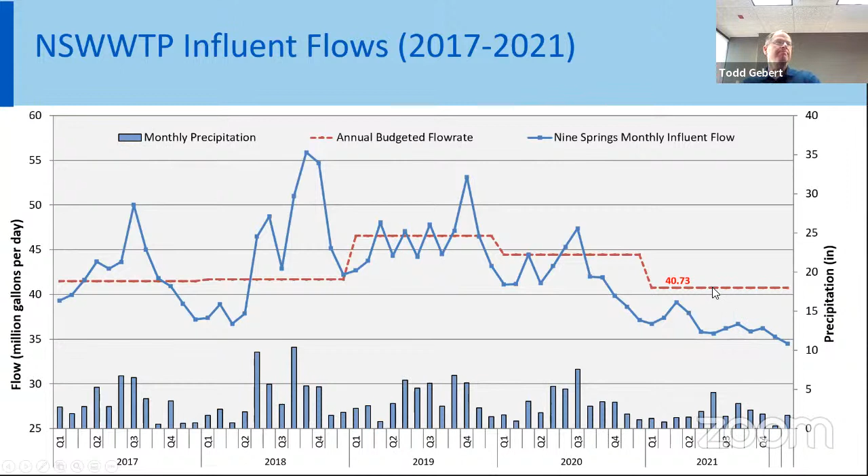They go in lockstep. So for 2021, we had about 22 inches of rain, about 12 inches below our average amount. You have to go back to 2012 for a very similar year, and you see about the same effect. Flows were in that 36 MGD range.

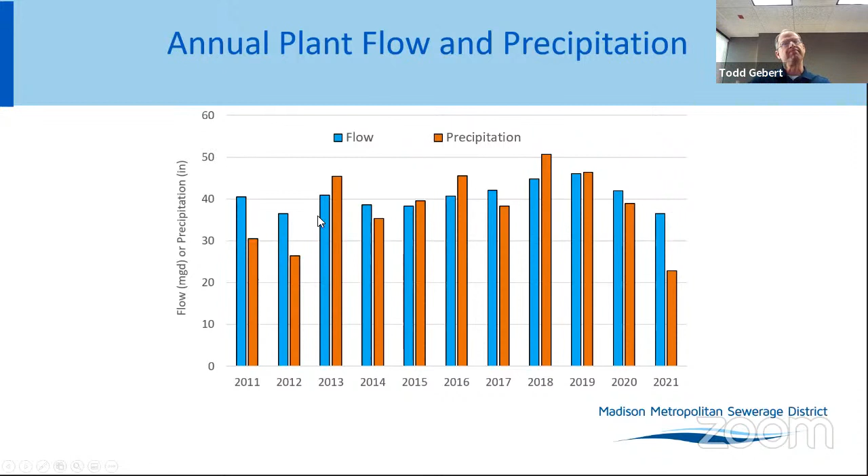That's not unique. What is unique, though, is the magnitude of these dips. In December, late December, during the Christmas holiday, we actually got below 29 MGD to the plant, and you have to go back pretty much to 2012 to see a flow that low to the plant.

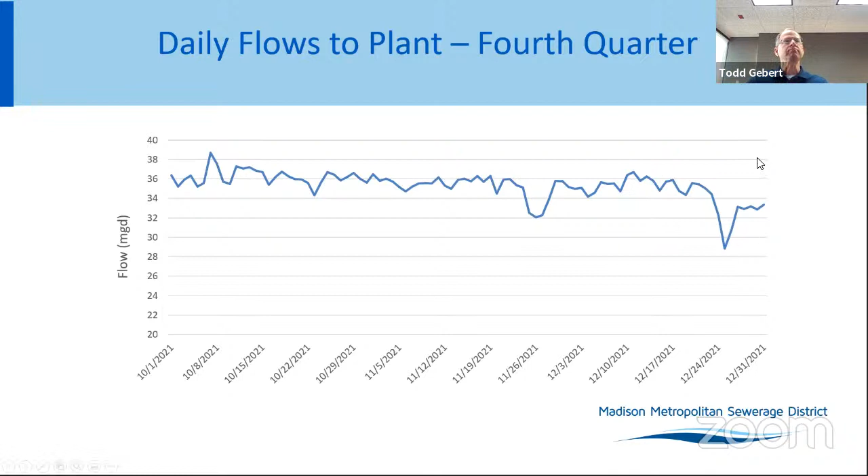Just a reminder here about why we saw such large surpluses. You go back to 2020 and the pandemic, you see how the loadings dropped throughout 2020. So when we did rate setting for 2021 in the fall of 2020, we assumed that loads would stay at their pandemic levels. Instead, shortly after that, they increased markedly and have kind of plateaued throughout 2021.

That represents this large surplus that you're seeing here in 2021. But the loads are really not that much larger than what we saw in 2019, just before the pandemic.

If you look back at the last 10 years, there's some ups and downs, but on average actual revenues have been only 1% above what we budgeted. So we're doing fairly well over the long term.

So the requested action today, staff is asking the commission to approve sewer service charges for the fourth quarter of 2021 through approval of resolution R7. And with that, I will take any questions that the commission may have.

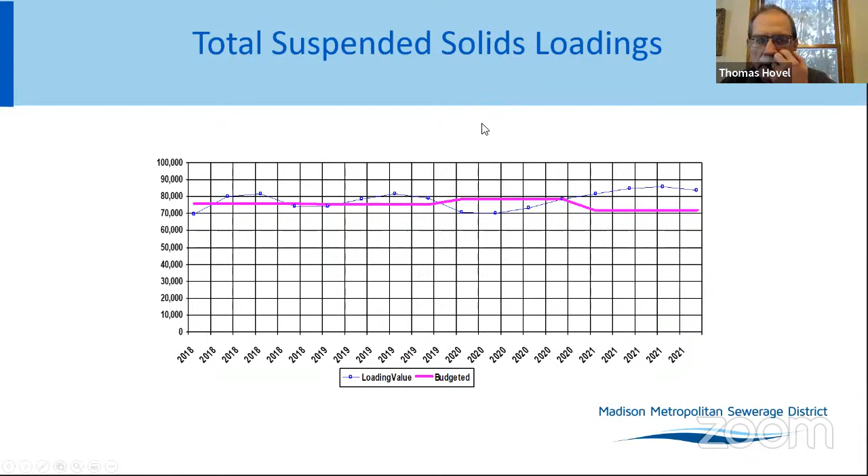Okay, thanks, Greg, for your question, and Todd. And if you have any other thoughts, Todd, you can get in touch with Greg. Sure. Okay, so any other questions? I didn't see other hands pop up.

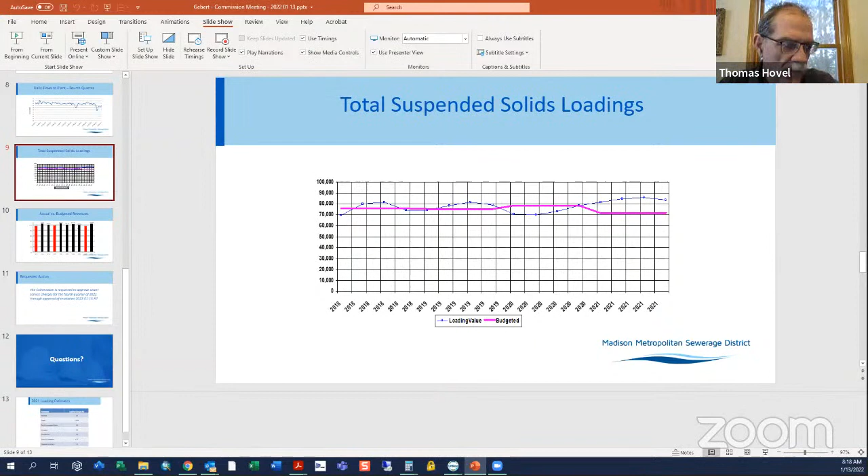So do we have a motion to approve the fourth quarter 2021 sewer service charges?

Wilson, I'm happy to make that motion to approve the service charges as indicated by the resolution presented. Okay, we have a motion by Commissioner Wilson, second by... I'll second. Okay, second by Commissioner Meyer. So motion by Commissioner Wilson, second by Commissioner Meyer to approve the fourth quarter 2021 sewer service charges.

Any discussion or additional comments? Seeing none. President Hovel, just a reminder to the commission, we have on the commission agenda coming up in a few weeks, with this increased revenue amount, how to direct those funds. Our budget manager will be returning to the commission with some specific action on that.

Okay, thank you, Michael. So we have the motion by Commissioner Wilson, second by Commissioner Meyer to approve the fourth quarter sewer service charges. All those in favor say aye. Aye. Aye. Do we have any opposed?

Okay, none, motion carries. That will take us to the acceptance of work for the Nine Springs Liquid Processing Improvements, Phase 1.

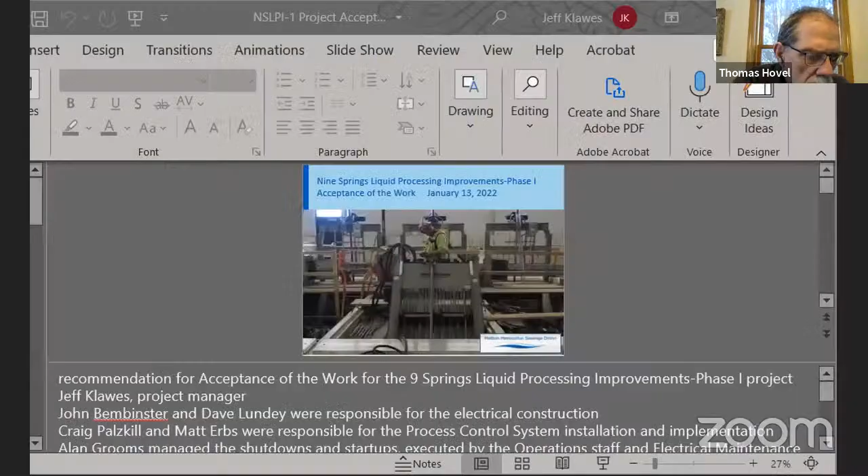Okay, am I able to share my screen now? Yeah, you can share your screen now, Jeff. Oh, sorry. Sorry, I've not done this before, so it's a little tricky.

Good morning. I'm Jeff Klawes, a project engineer here at the district. I was the project manager for the work. The presentation is a recommendation for acceptance of the work of the Nine Springs Liquid Processing Improvements Phase 1.

As I said, I was project manager for this work. Other district staff involved: John Bembinster and Dave Lundey, responsible for the electrical construction; Craig Palzkill and Matt Erbs, responsible for the process control system installation and implementation; Alan Grooms managed the shutdowns and startups, which were executed by operations staff as well as electrical maintenance staff. The consulting engineer for the project was Strand Associates. The general contractor is C.D. Smith Construction.

The photo here is of our new installation of our new ultraviolet light system. The liquid processing improvements enable us to effectively manage future peak flows, specifically preventing in-plant overflows, improving peak flow treatment, and minimizing process disruption during peak flow events. We also improve liquid processing reliability by replacing or rehabilitating critical infrastructure.

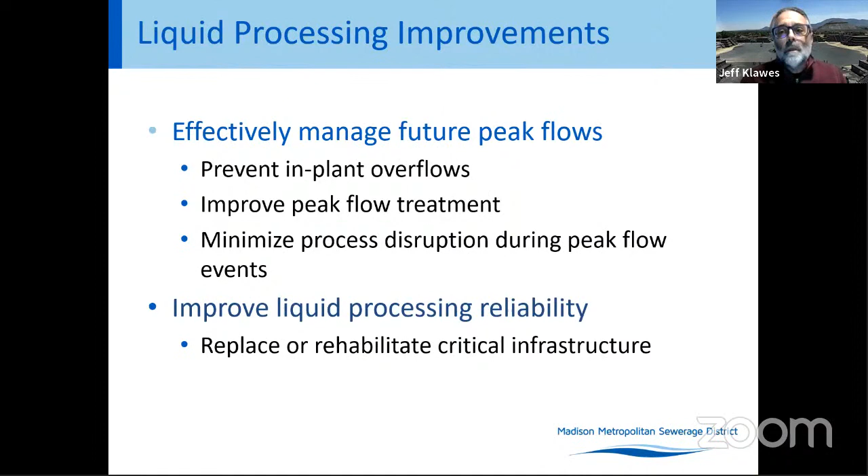The construction work took 18 months. Substantial completion ran about 4 weeks beyond our original scheduled date. The ready-for-final-payment date was extended further, mostly to accommodate the delayed delivery of some minor equipment for the project. The UV disinfection system was ready for service for the 2021 season. The work of removing the old system and replacing it took place in the October 2020 to April 2021 timeframe.

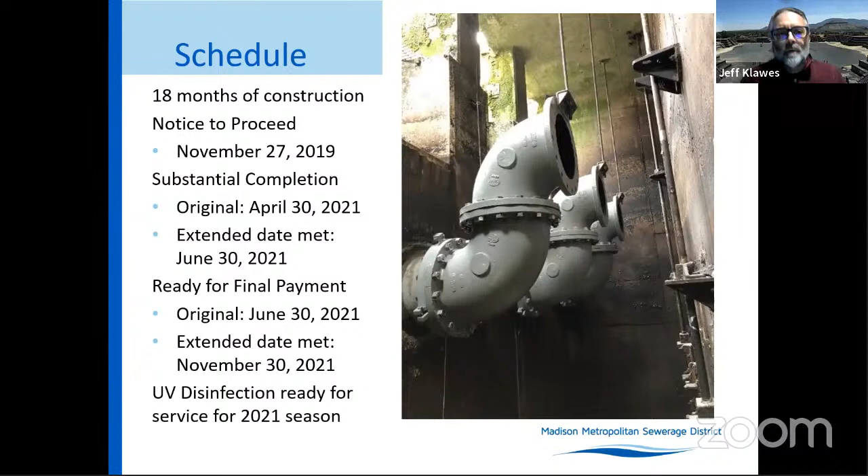The total project was completed within budget. For the construction contract, there were 65 change orders amounting to about a 3% increase.

There were no significant changes to scope. Mostly the change orders were detailed change orders, making pieces and parts fit, replacing what was needed to move the project forward, and repairs and replacements that were best done within the context of the project. The photo to the right is actually a change order.

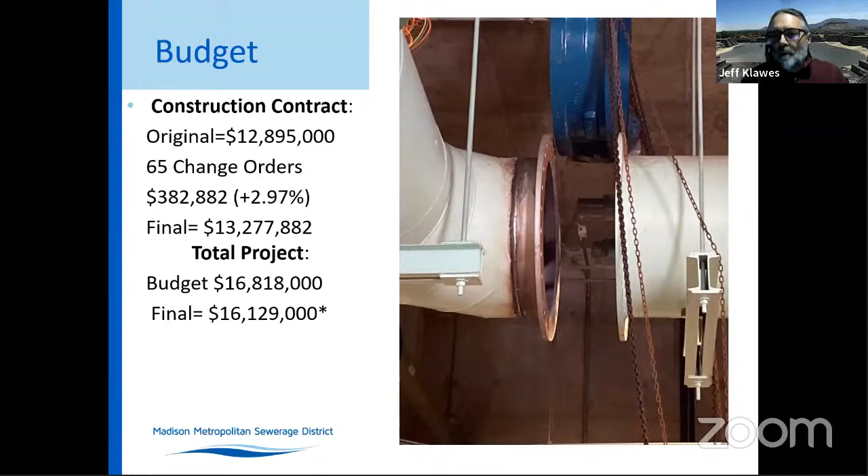The new blue valve, you can see my arrow there, was part of the contract work. The intention was to reuse the existing pipe. The pipe to the right was fine, in good condition. To the left, the existing flange was corroded to the point where we couldn't reuse it. The contractor fabricated new pipe, cut off the old pipe, and welded this in place. For perspective, this is a 30-inch diameter steel pipe, and all of the work was done about 18 feet off the floor.

We're now able to better utilize final clarifier capacity, mostly the west final clarifiers, and the improvements also allow a more equal split of peak flows between the east and west plants. The improvements to the existing plant to better utilize capacity and peak flow performance are listed here.

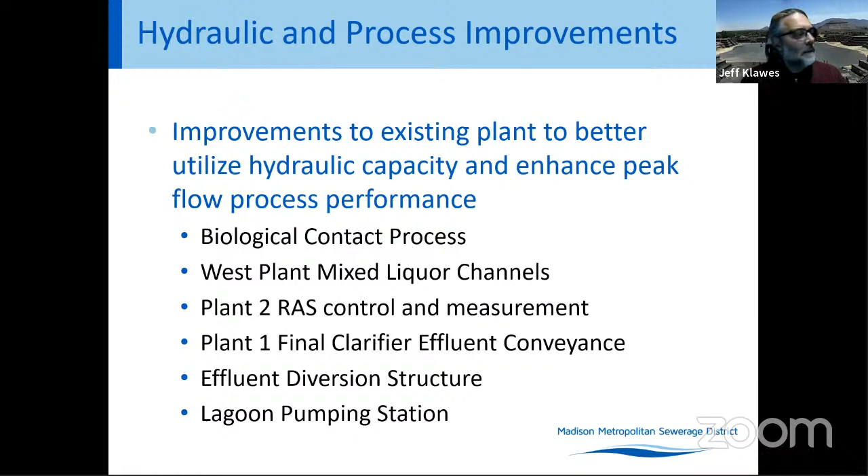The implemented biological contact process, work for the west plant mixed liquor channels, the plant 2 RAS control and measurement, plant 1 final clarifier effluent conveyance, effluent diversion structure, and the lagoon pumping station. The locations of these project elements are shown here.

The biological contact process implementation, which revises the flow pattern through the aeration tanks, was completed in both the east and west aeration tanks. The west mixed liquor channel takes flow from the aeration tanks to the final clarifiers. We increased the size of the final clarifier effluent for plant 1 here. The plant 2 RAS control and measurement improvements were done in the aeration control building 3.

As explanation, mixed liquor flows from the aeration tanks to the final clarifiers, where activated sludge settles out. Some of the sludge that settles out is pumped to the digesters as waste activated sludge. The remainder of the activated sludge is pumped back to the aeration tanks, returned as return activated sludge, or RAS.

The old valves that were in place in the aeration control building were very difficult to operate, particularly at peak flow events. The open channel measurement that was in place would flood out and become inaccurate. So we replaced the valves with new control valves and electric mag meters for flow measurement.

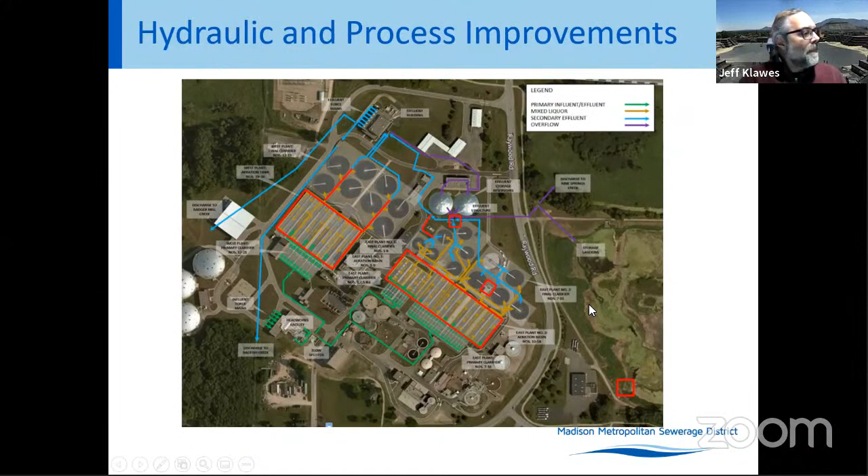For the biological contact process, the implementation was in the aeration basins. What we're looking at here is the west plant, which actually has 2 plants within it: plant 3 and plant 4.

Once the meters and valves were installed in the gallery below this channel, and once all the plates were in, we put plant 4 back into service, and work was done in plant 3. Valves and meters were installed in the gallery below this. Once those meters and valves were in service, plant 4 was taken out of service and plant 3 was put back into service.

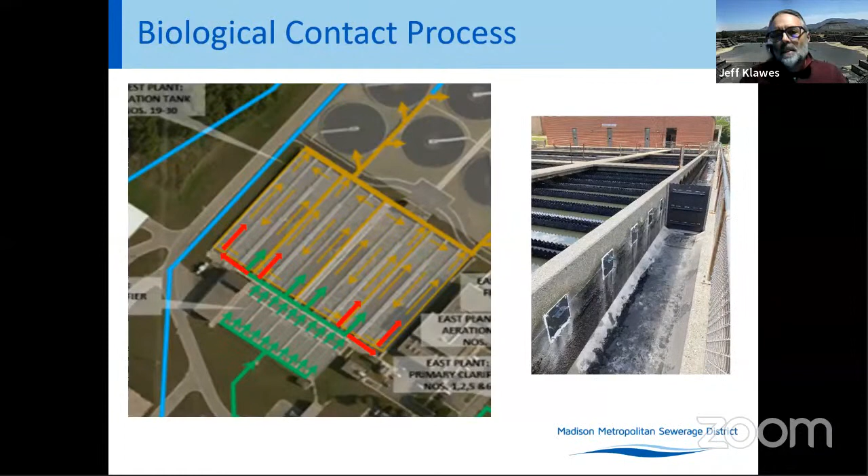I just want to comment that the complexity of these shutdowns, startups, and transfers is not just draining and filling the tanks, but also maintaining the efficacy of the biological process throughout those changes and afterwards.

For the west plant mixed liquor channels, we needed to increase the capacity of the channels to convey, so that we were able to convey 90 MGD through the west plant. We increased the height of the walls to be able to convey more flow. We also worked on replacing the aerators in these channels.

You can see that the old pipes were really badly corroded, with only about half a pipe section remaining. The new aerators and pipes were put in place. Here you see the completed channel where the walls are raised, the aerators are in place, and the channel is ready to be placed back in service.

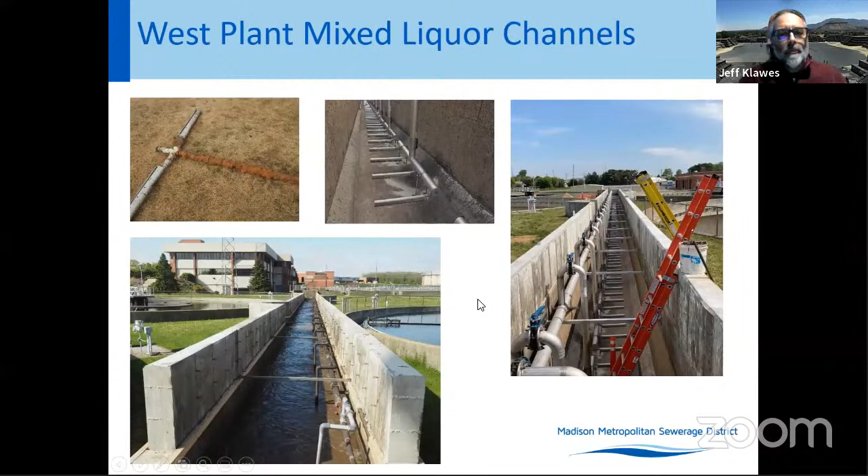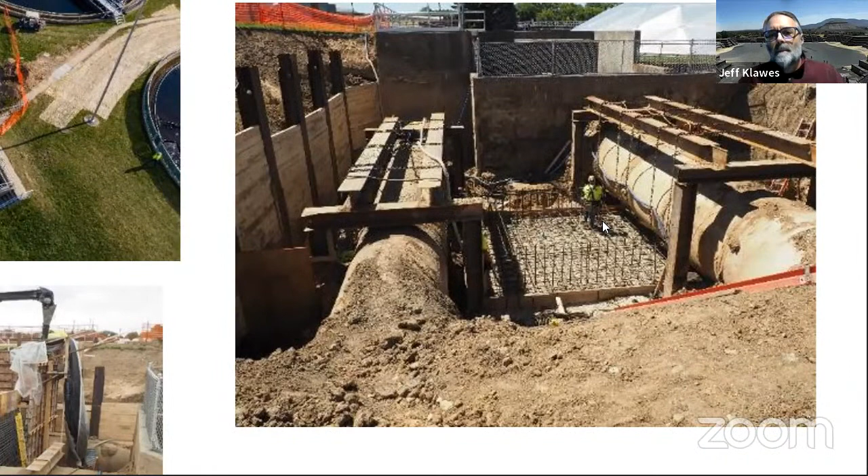So the structure that we built in between allows us to take flow directly from this east plant effluent pipe, put it directly into the overflow, and send it to the lagoon without having to go through the effluent building first. The picture to the left just gives you an idea of the scale of the structure.

At the lagoon pumping station, this returns that stored overflow so that the pumping station allows us to send it back to the plant. Most of the work was construction of a screening facility.

To do that, the contractor had to both isolate the construction site from the lagoon. They did it with this dam here. And then for the excavation, they had to hold back the soils as well as be able to dewater the site.

The completed intake structure is here, where you can see the screen and the isolation gate in place. So the structure allows us to both isolate it from the lagoon and prevent debris from getting into the pumps. We added a redundant pump, new controls, and also metering of the flow. Both the isolation gate and the stairs to the screening structure provide a safer work environment for our staff.

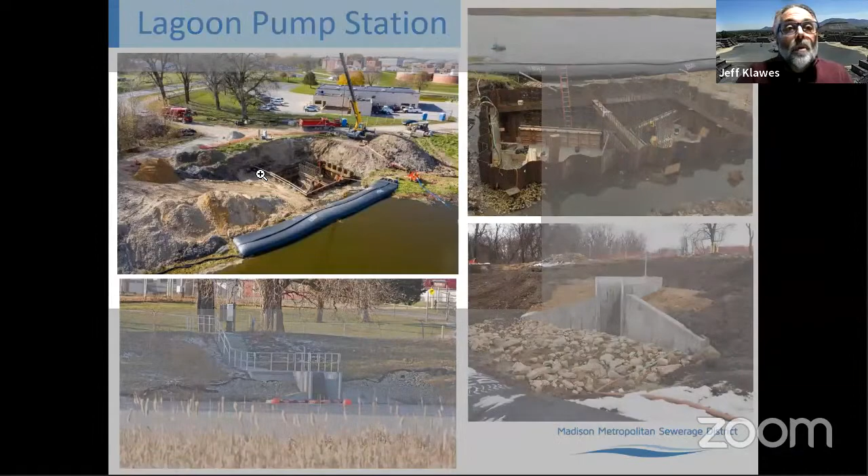Just as with the actual pump station itself, the screening structure is here. The pump station is underground in here. So the screening intake is here, connects to the pump station, and then sends back to the plant. And also this is where the controls, we provided new controls there.

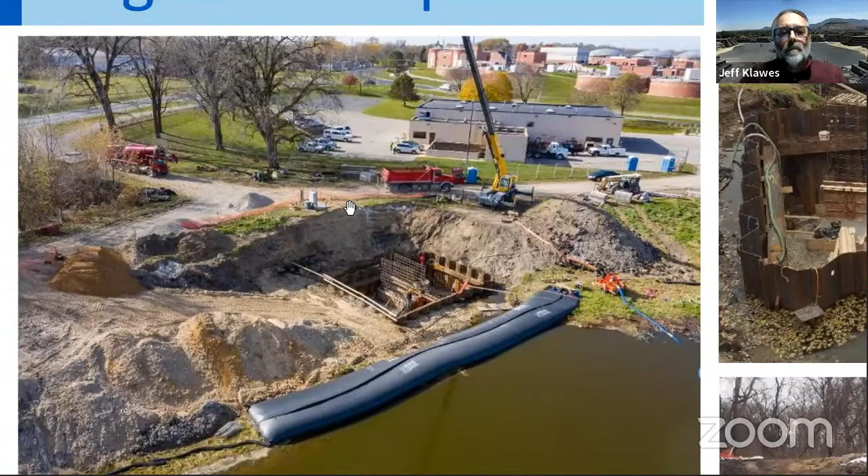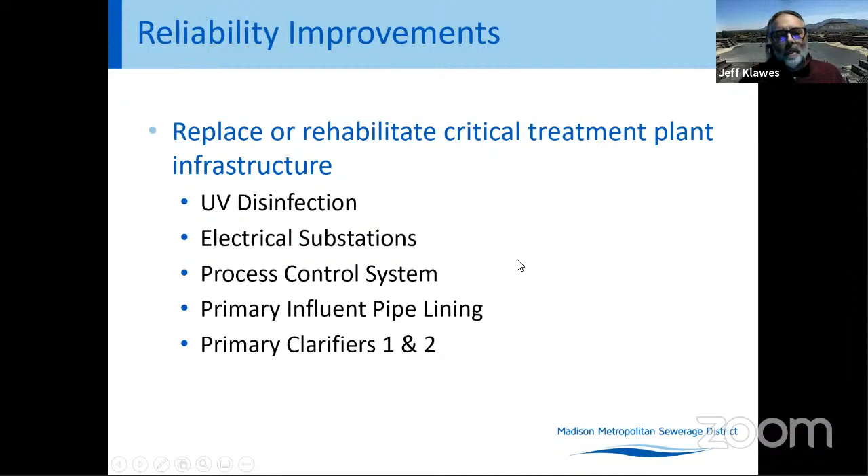For reliability improvements to the infrastructure within the plant, those items were the UV disinfection, electrical substations, process control system work, primary influent pipe lining, and also work on primary clarifiers 1 and 2. Those items are located here.

The ultraviolet light system was installed in the effluent building. We provided a new electrical substation which replaced 3 substations. U6 now provides the service that stations 11, 12, and 13 once did.

The process control system upgrades replaced digital control units related to the liquid processing system. They're located in the west blower building, aeration control buildings 4, 1, 2, and 3, and also in the east blower building.

The primary influent pipe lining is this red line here, where we went from the east junction structure, took a bend, and then went into the east primary influent channel. And finally, for the rehab projects, we replaced concrete at the primary tanks 1 and 2.

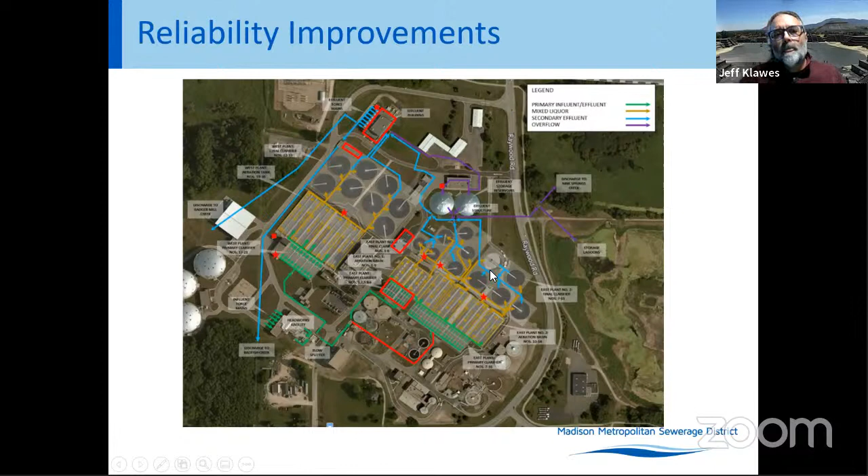For the UV disinfection replacement, the old system was obsolete. It was no longer supported by the manufacturer and required labor-intensive maintenance. The new system is energy efficient, self-cleaning, and more maintenance-friendly for our staff.

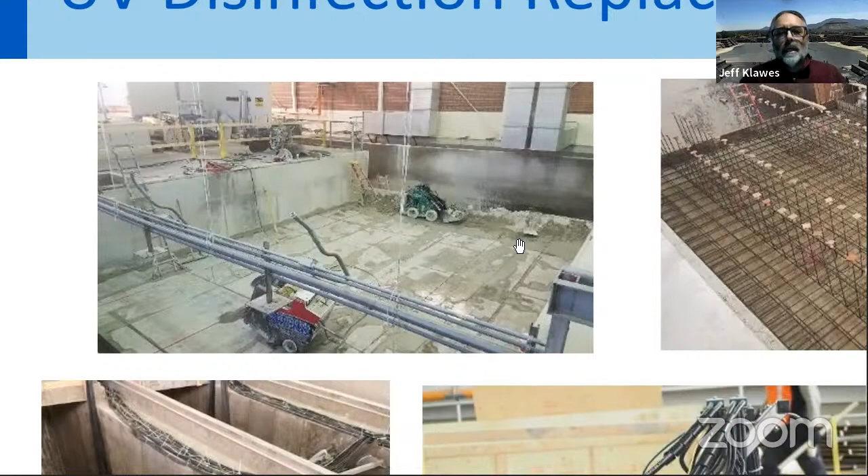Here we see where they're removing the old equipment, which is already gone at this point. The walls of the old channels are gone, and they're removing the channel slabs. This is where the new UV channels are under construction.

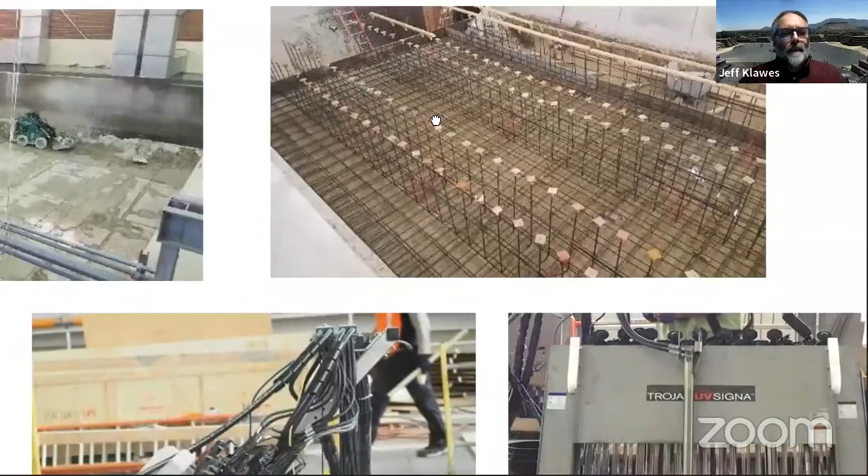Then you have the UV banks in place. And then you can see the cables to all of the lamps, and the hydraulic hoses as well.

Each of these banks can be raised and lowered mechanically. There's a hydraulic system, which is different than the old system where the entire thing had to be lifted out by a crane.

On an individual bank, this is one in a raised position, and you can see the holders for the lamps. The individual lamps go into each of these holders, and when a lamp burns out, you can actually just change one at a time. This unit is in the raised position.

You can also do it when they're in the channel. And again, this is much simpler in terms of replacing a burned out lamp than having to remove the entire bank from the channel.

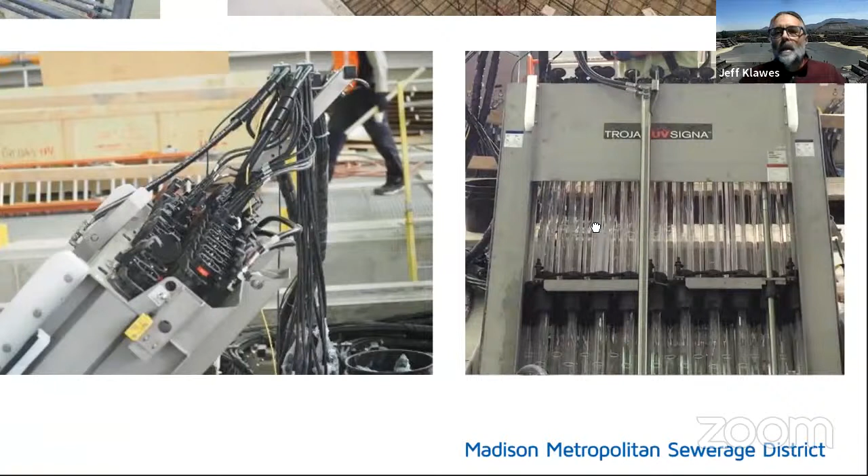The individual tubes that hold the lamps have a cleaning system, these units here, which act like squeegees. They're mechanically controlled by the hydraulic system and slide up and down to clean off the lamps, so throughout the season the lamps stay clear and maintain their efficiency for transfer of UV light into the system.

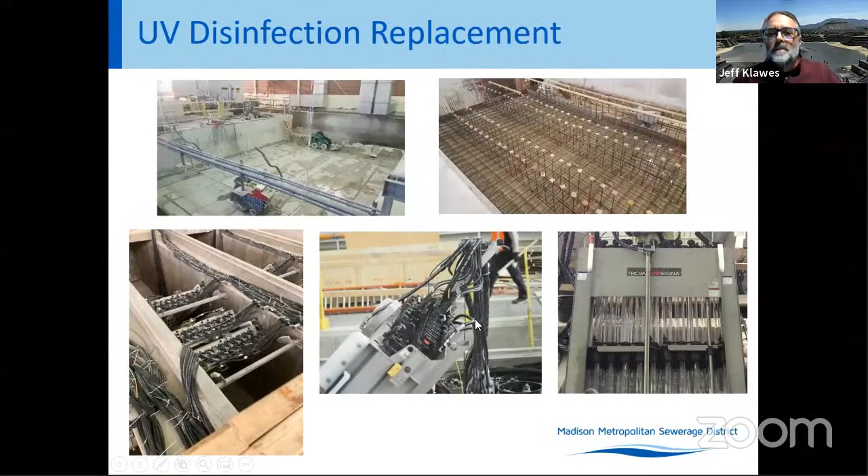For the electrical substations, we replaced 3 outdoor substations with 1 indoor substation. Moving all of the substation equipment indoors protects it, makes it easier to maintain, and the new equipment is much safer for operations and maintenance staff.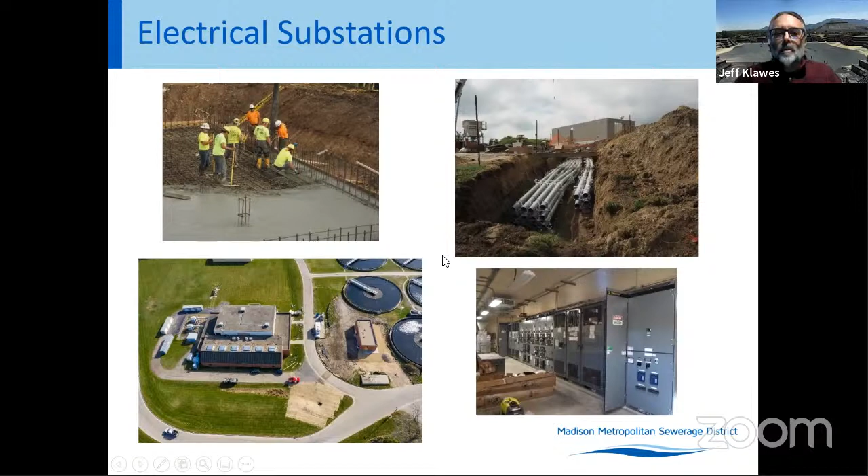For the process control system replacement, it completes the upgrades started in 2013. We'll provide new state-of-the-art controls, including a touchscreen smart interface, allowing operators and maintenance staff to not only control the equipment but also see histories and trends on-site and make adjustments as needed.

The project replaced equipment with state-of-the-art technology. We replaced what was basically 1960s space-age technology, and 1980s digital control units were replaced as well.

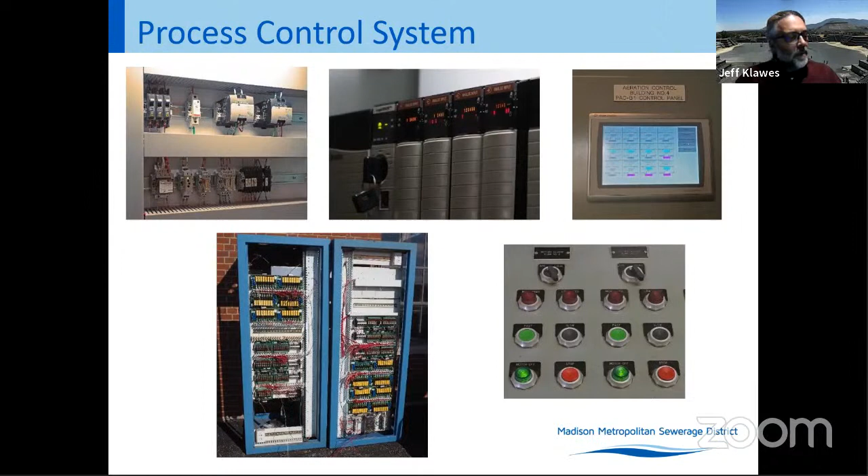The other aspect of the process control system work is the separation of equipment power from equipment control, which provides for a safer operation and maintenance environment for staff.

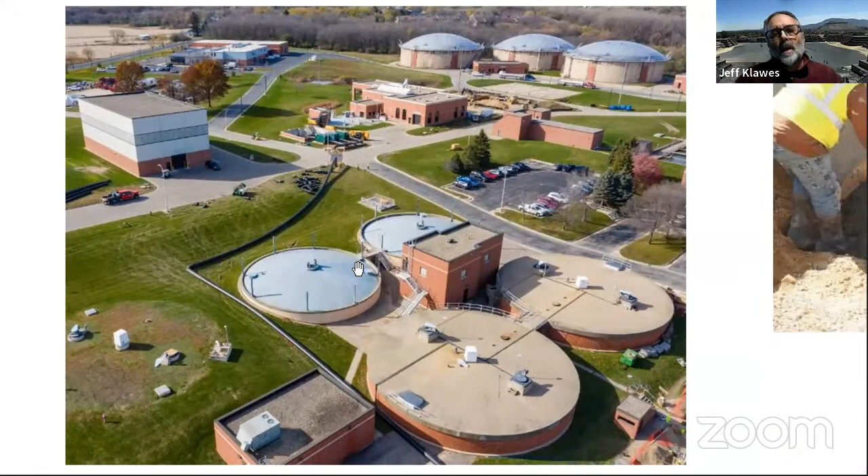For the primary influent pipelining, I have a photo below showing the bypass setup that was necessary for lining the pipe. The flow normally flows underground from the flow splitter.

There's a pipe that goes from here to here, and then from here a pipe goes here and takes a left. But we lined from this junction structure this way. So 3 very large pumps were installed at the flow splitter to pump flow through this HDPE pipe to the primary influent channel.

We needed to install a new access structure. We knew the pipe was in poor condition, which is why we were lining it. When we excavated to build the new structure, we found that parts of the pipe, including the crown and side pipe, had collapsed. We partially installed the structure and provided a temporary repair to the pipe so the structure could be completed and backfilled, with the pipelining following after.

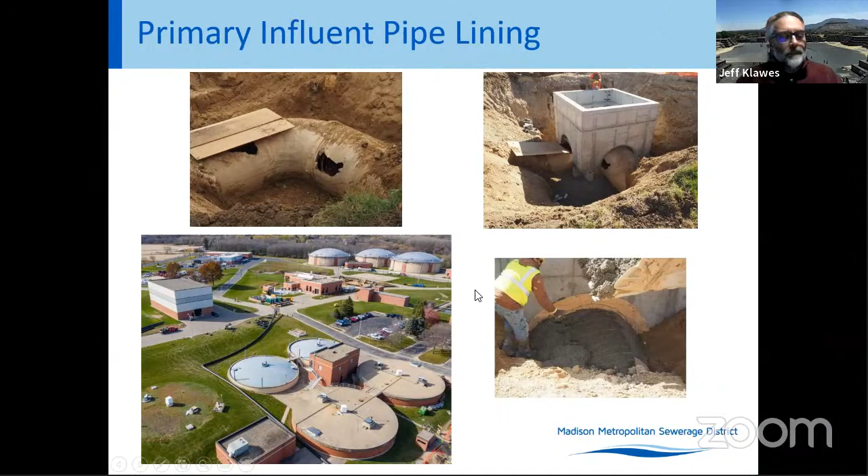For the rehabilitation of primary tanks 1 and 2, we replaced the deteriorated concrete. This required cutting up all of the existing concrete on top of the tanks, replacing basically everything above the normal water line. In this photo, you can see the fellow sawing the concrete where the normal water line is about here.

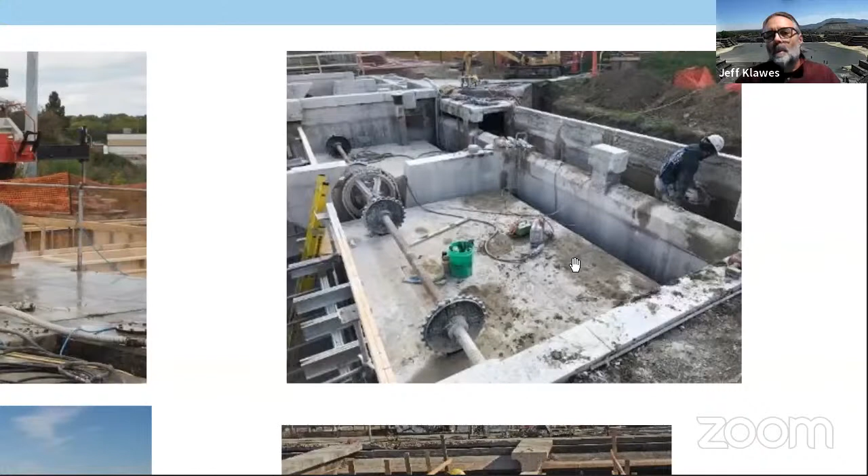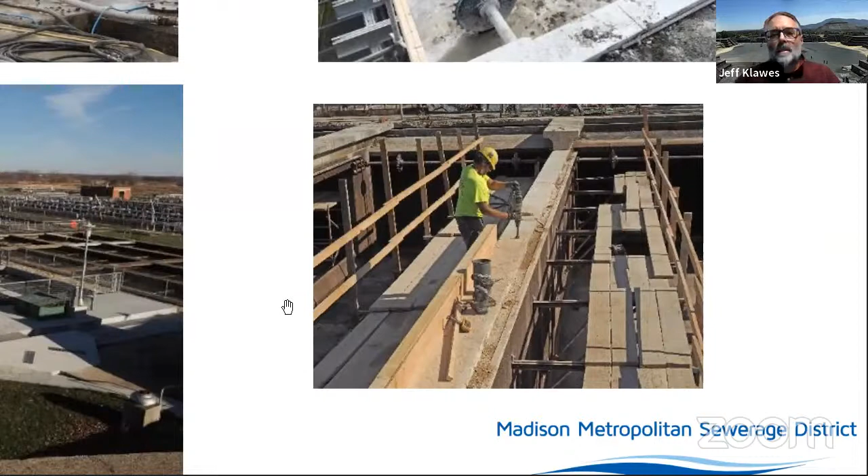Above the water line, you can see a lot of deterioration. Below the water line, where the concrete is always submerged, the tanks are in good condition and serviceable for probably another 90 years. Here you can see them prepping the concrete, which is in good condition, and they'll be adding to that. The final outcome is what looks like a new tank on top of a 90-year-old tank.

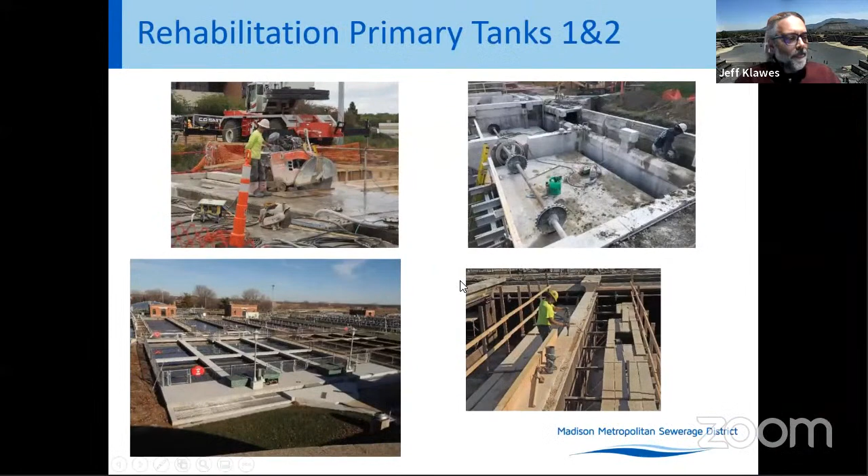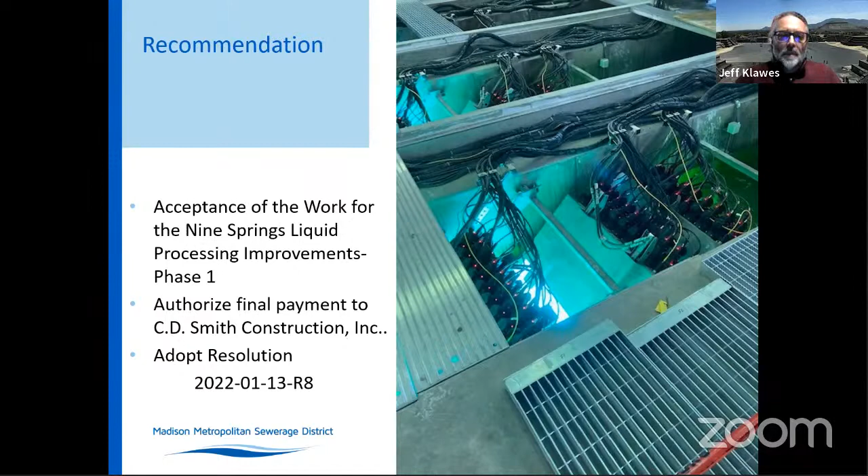So the recommendation this morning is acceptance of the work for the Nine Springs Liquid Processing Improvements, Phase 1, and authorization of final payment to C.D. Smith Construction, with adoption of Resolution 2022-01-13-R8. With that, I can take any questions.

Okay, thank you very much. Thank you very much, Jeff, for the detailed inventory of what occurred. Do we have any questions?

Okay, I don't see any hands. Nice photo with all the snow, a few inches that we have.

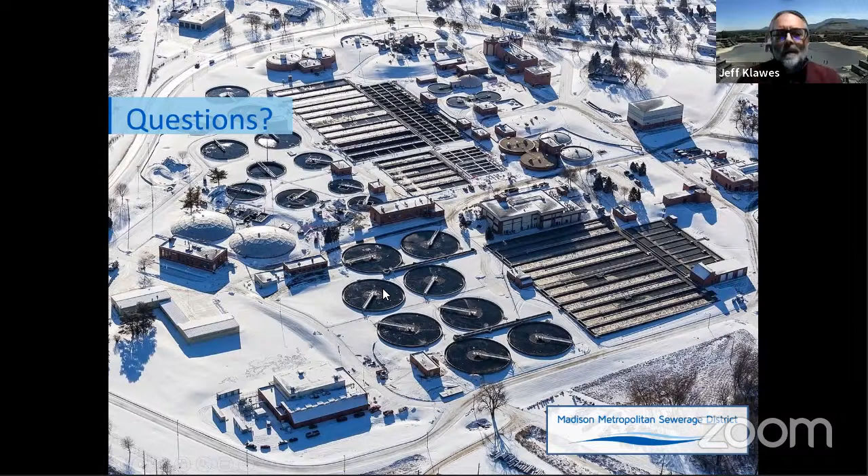This was from during the project, actually. Still working. Was that last winter then? Yes, it was. I think, based on what this trench looks like, it was probably the beginning of January.

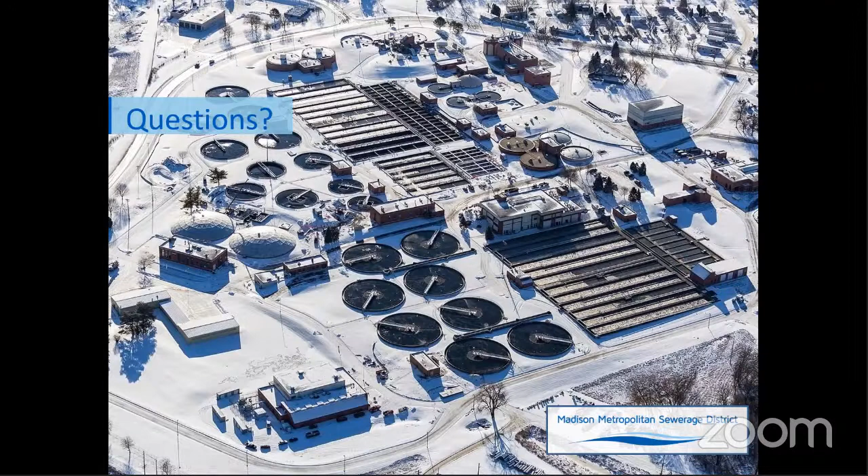Okay, so I don't see any hands for any questions. Do we have a motion to approve the resolution for the liquid processing improvements, acceptance of work? I'm happy to make that motion. Motion by Commissioner Meyer, second by Commissioner Eskridge, to approve the resolution accepting the work for the Nine Springs liquid processing improvements. Any further discussion or comments?

I might just notice because it was such a great, thorough presentation that there are no questions, but a very impressive project, Jeff, and well executed under budget. Really good work. Thank you. Good job to the whole staff that was involved with this.

President Hovel, I also wanted to jump in here, and we provided a little bit more detail here today, and I think it's important. When the commission approves a large promissory note like this, sometimes it's a lot of money, and we thought, well, what is the public getting for $13 million, and really getting into a little bit more of what was involved. This one did four major things for us, and why it's a big milestone: we're replacing critical infrastructure, increasing our capacity, and improving our resilience for peak storm events. And then we're lowering our operating costs and improving safety. So all of those elements are part of this project.

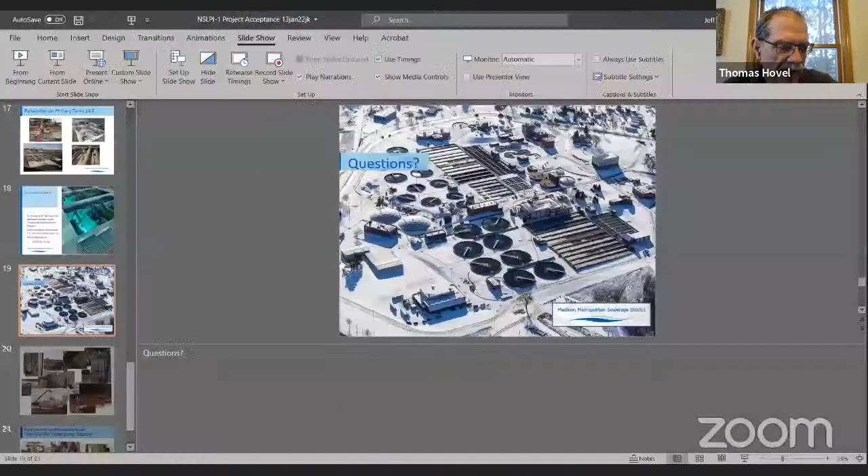Okay, so we have a motion and a second. All those in favor say aye. Aye. Aye. Aye. Any opposed? None. Okay, motion carries. That will take us to item 4C, the increased fees and professional service contract amendment with Brown and Caldwell for the 2021 Inflow Infiltration Reduction Program. Jen Hurlebaus, I think you're going to lead this off.

Yes, thank you, Commissioner Hovel. All right, is that sharing the slide screen? Looks good, Jen. All right, thank you. Good morning, Commissioners. I am Jen Hurlebaus, Collection System Engineer.

Today, I'll provide a progress update on the Inflow and Infiltration Reduction Program and our plan for the next phase of work. Just to recap, Inflow and Infiltration describes excess clear water from groundwater and stormwater sources that flows into the sanitary sewer system through various defects or connections. Our collection system and treatment plant both have capacity limitations. Even with improvements made at the treatment plant, there is still a limit. So our concern with having an inflow and infiltration reduction program is to make sure that, especially during significant storm events, we are not overloading the system and causing sewer backups into homes and buildings, or sewer overflows into rivers or lakes.

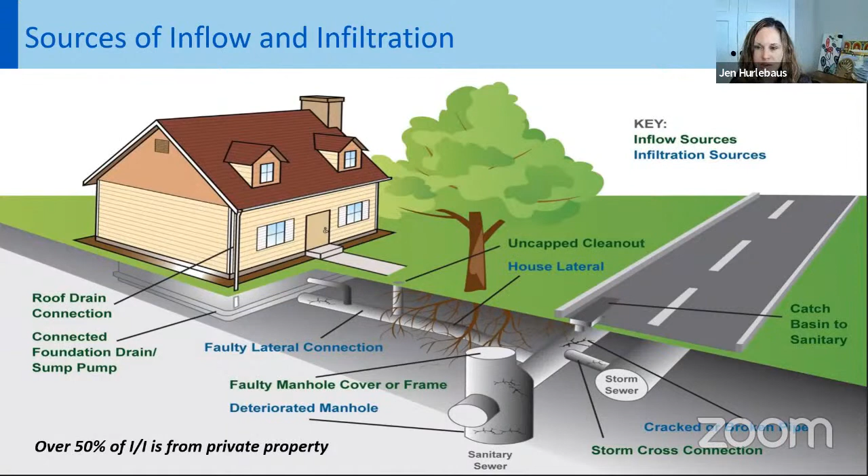So when we're talking about our inflow and infiltration program, or I&I for short, there are several ways we look at the value of this program. As a reminder, this inflow and infiltration issue was identified as a top priority during our owner community meetings held in 2019. A lot of that was understanding the vulnerability our system saw during the August 2018 event, as that top picture shows, of the sanitary sewer overflow that occurred at that time.

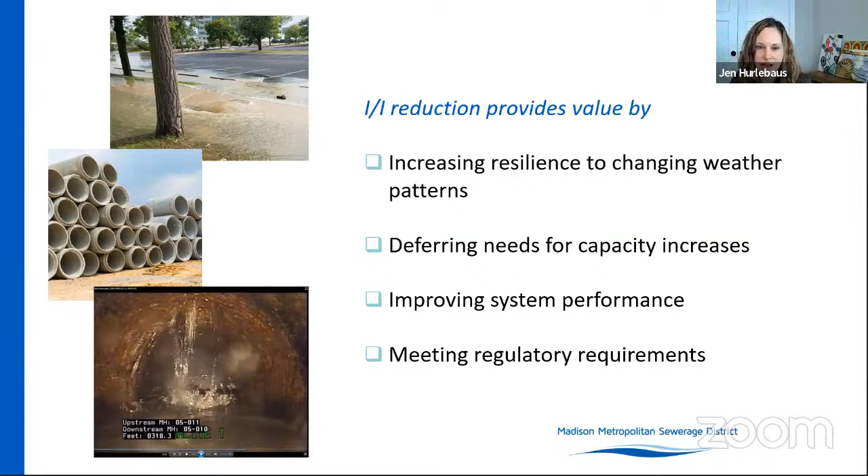Our goal for this regional program is to maintain the flow standards defined by the Sewer Use Ordinance. I&I reduction will be required to meet this goal. The value of reducing I&I to maintain the flow standards is that the need for capacity increases is reduced or deferred. Less I&I means the system performs as it was designed to, and that increases resilience to changing weather patterns—there's more available capacity if you're not being taxed by smaller rain events. And perhaps most simply, we need an I&I reduction program to meet our regulatory requirements.

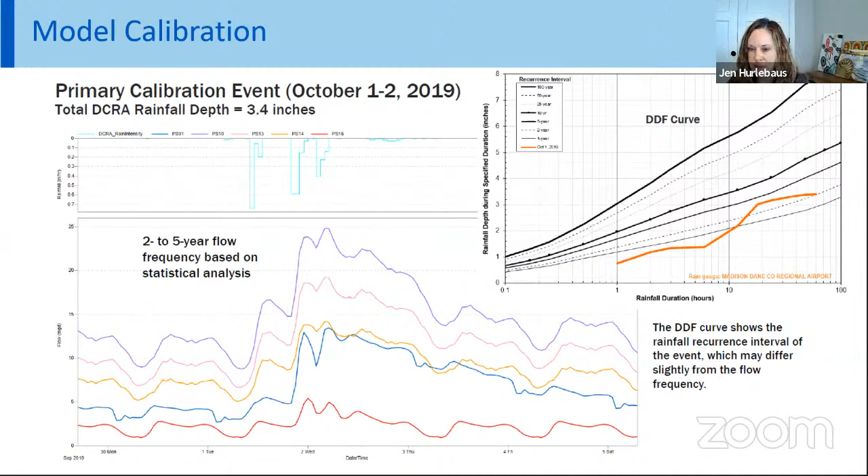As you can note, we're seeing that large peak event right here, which is the October 1st event, with a slightly delayed response. The flows then stay higher for about a week after that peak event.

During calibration, we took a different approach and utilized the groundwater modules in PC SWMM, the modeling software we're using, which allowed us to replicate the majority of the flow response. This indicates that I&I in the district system is predominantly from infiltration.

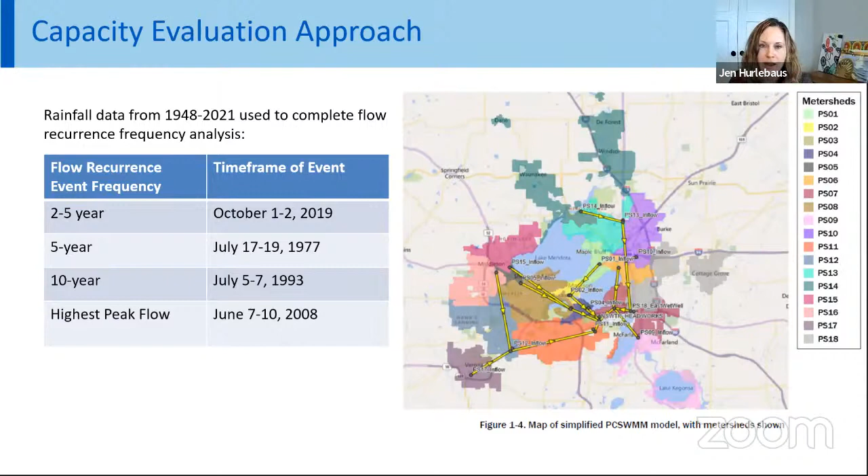And the August 2018 event is an outlier. We had very different rain throughout our collection system, and it was an extremely large event. So simulations, if we only used rainfall from Dane County Regional Airport, wouldn't really represent what had happened on the west side. So we really just don't even consider that as a model event to look at.

So for the capacity evaluation, we're going to look at 4 scenarios that will be modeled to assess the impact of I&I on system capacity. It's a combination of existing and future flows with existing and increasing I&I conditions due to system degradation. So what we'll do is show these capacity limitations, then determine what improvements to our system would need to be made to increase the capacity to convey the wastewater without I&I reduction, and calculate the cost to make those improvements.

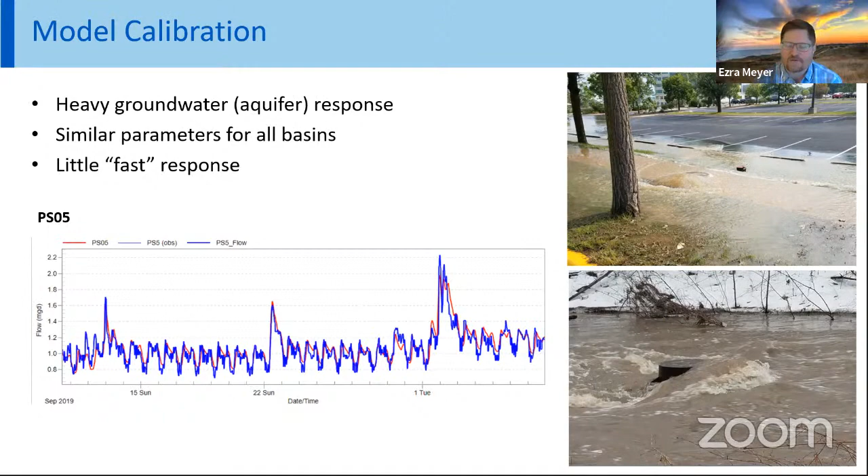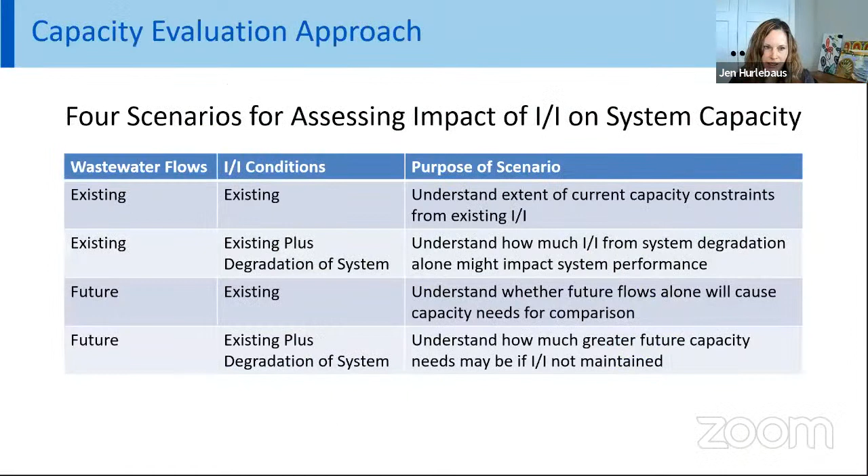Go ahead, Ezra. Just making sure I understand all of this, but the words get me tripped up a little bit when we talk about increasing fees for the 2021 engineering services. But of course, 2021 is over. We're increasing the scope, increasing the budget, and extending the schedule of an existing contract rather than launching a new contract for this next phase of effort. Am I on track, Jen? Yeah, absolutely. Given the way we had the program implementation plan and where we were in the stage of work, we felt that putting this out as a traditional new RFP did not make sense at this time, so we're continuing our services and just increasing the transaction amount on the existing contract.

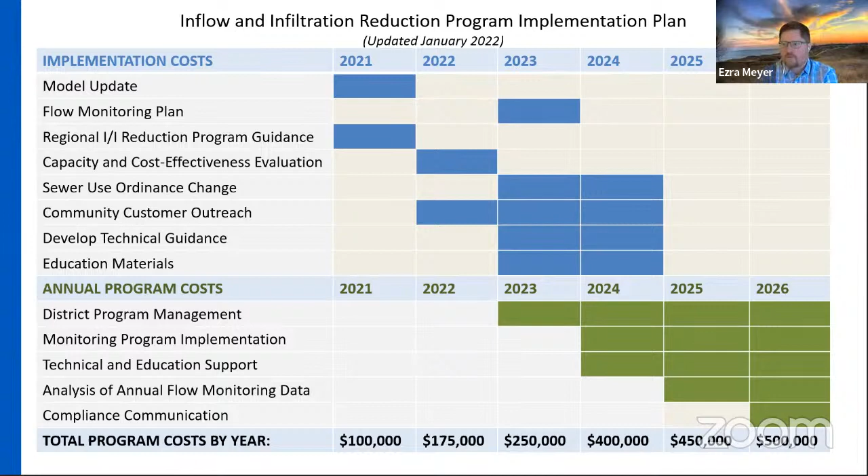Perfect, understood. I'm ready to make a motion to approve the resolution as proposed. Okay, we have a motion to approve the resolution by Commissioner Meyer. Do we have a second? I'd be happy to second it, Murphy. Okay, motion by Commissioner Meyer, second by Commissioner Murphy. Any further questions, comments, or discussion? Okay, hearing none, all those in favor say aye. Aye, aye, aye. Any opposed? None, motion carries. Okay, so that takes care of items under number 4.

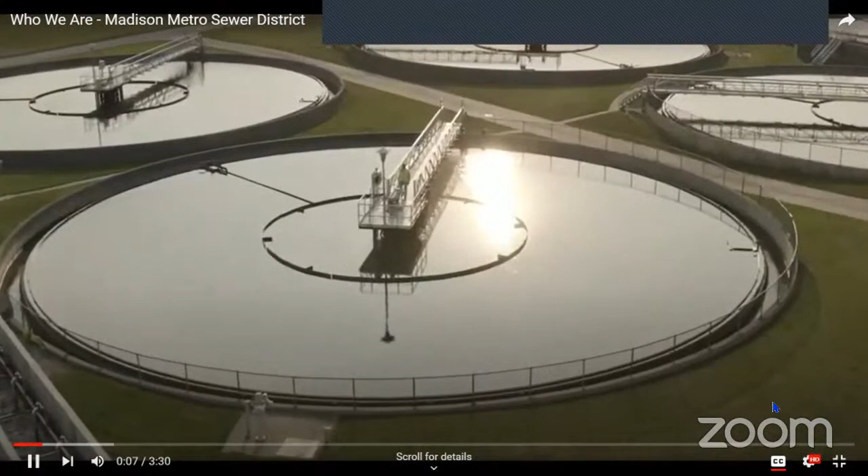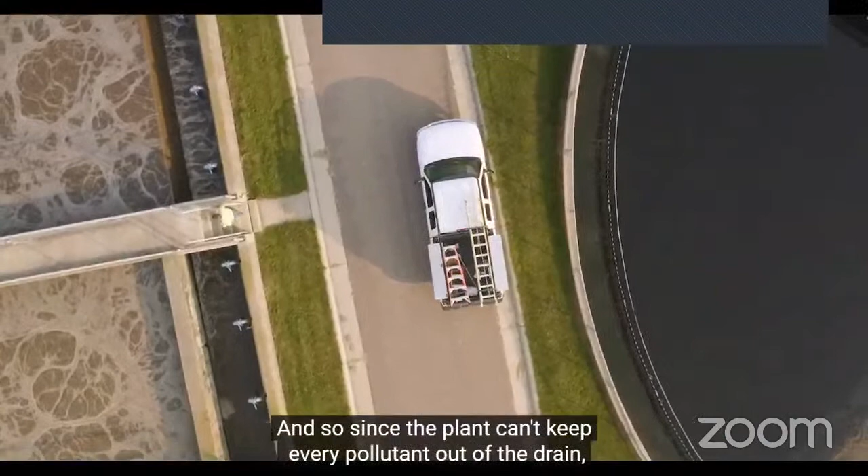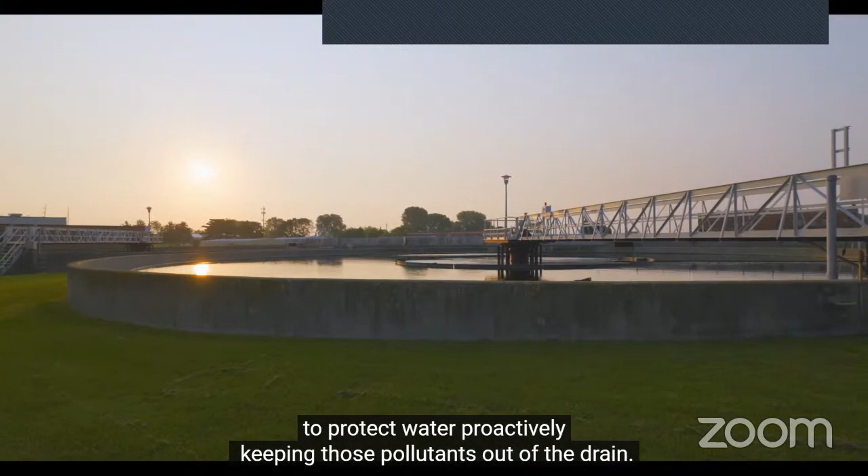For a long time, wastewater plants just wanted to focus on what's going on at the plant. But that approach has its limitations. Since the plant can't keep every pollutant out of the drain, we need to go upstream into the community and educate people, introduce them to the sewer district because they might not know who we are or even where their water goes, and help them take steps to protect water proactively, keeping those pollutants out of the drain. What's really motivating for me to come to work is we work for the public, we work for our neighbors. I work for my neighbors, and we do something of real value to them. We keep their water clean and we keep everyone healthy through the work we do.

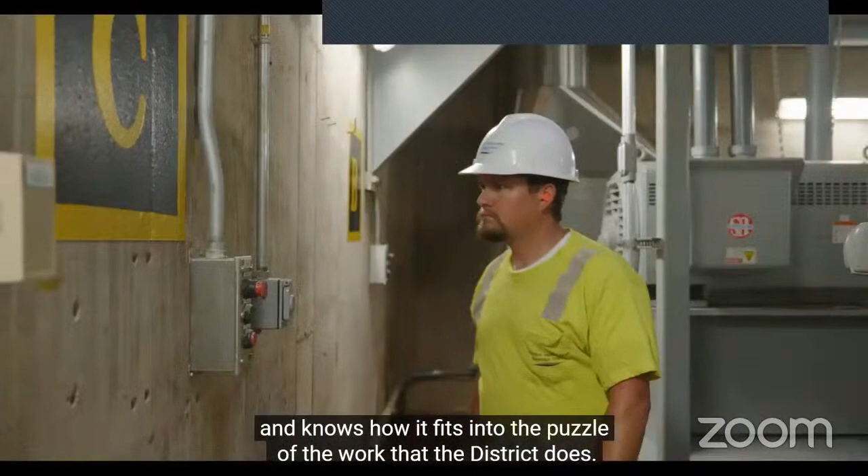Every person that I've met so far is just passionate and loves their job and knows how it fits into the puzzle of the work that the district does. The mission at the sewer district is to protect human health and the environment, and we take that job very seriously. A lot of people forget what happens when they flush the toilet or send something down the drain, but we're here every day making sure we can treat that water for the benefit of the community so we can keep the streams we discharge into clean and basically recycle the water.

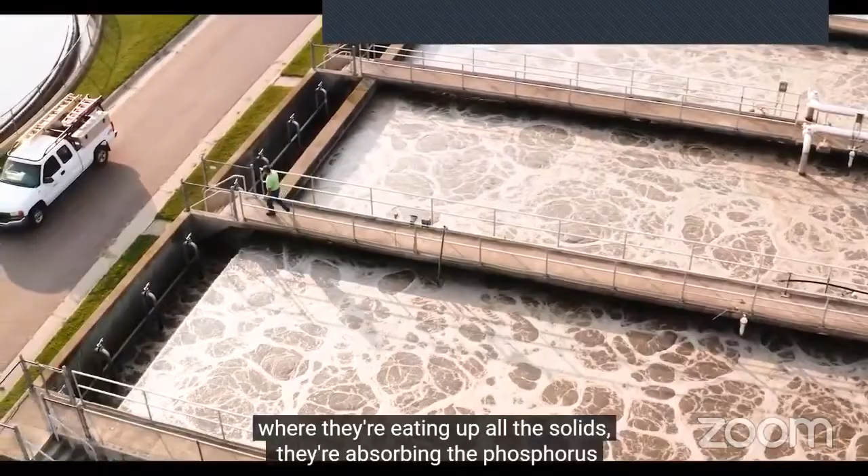So we have about 15 quintillion bugs in these aeration tanks where they're eating up all the solids, absorbing the phosphorus and nitrogen, which are pollutants in our environment. We're taking out the solids and turning that into fertilizer. One of our principles is to recover resources from wastewater, seeing it not as a waste product, not as something that's just the end of the line, but a beginning once it gets cleaned up.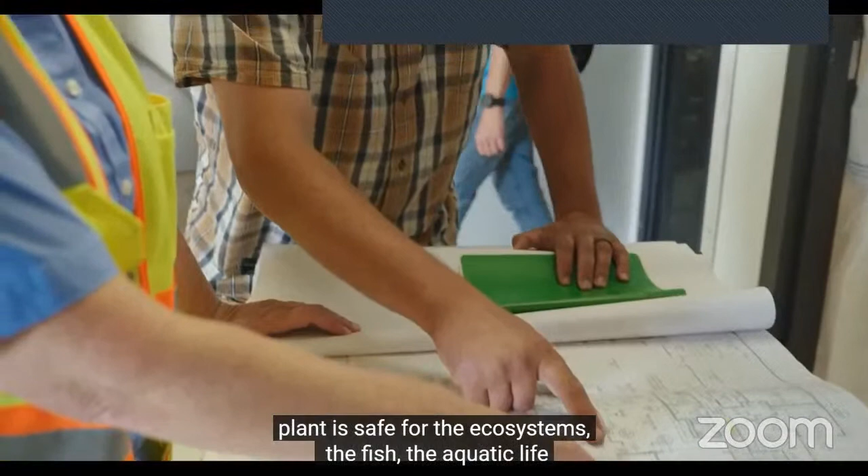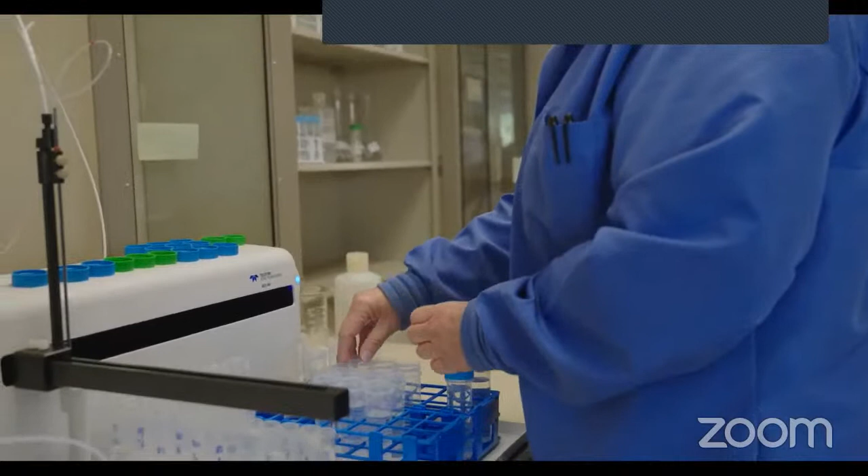So we are cleaning water to protect public health and the environment, making sure that the water we send out of our treatment plant is safe for the ecosystems, the fish, the aquatic life in the streams, as well as people who are using those streams, and that we can use the resources to enhance life. Everybody brings a unique skill set to the table, and at the end of the day we're all able to come together. It doesn't matter who you are, people will all pitch in and get the job done.

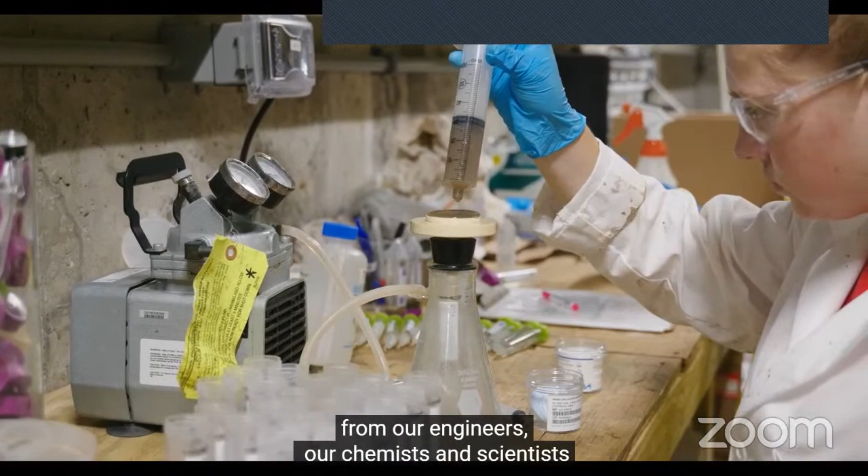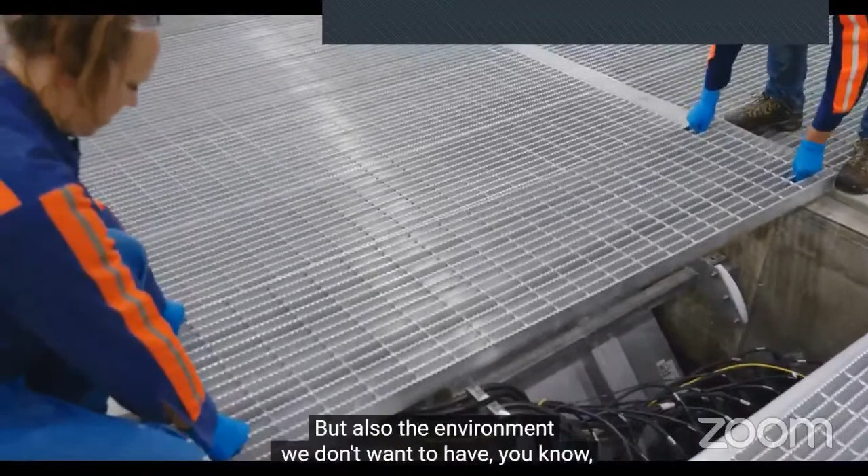We work together very well, from our engineers, our chemists and scientists, to daily operations. It's a big focus - not only are we treating the wastewater, but we also have to make sure we can do it safely for our workers so they can go home to their family every night, but also for the environment. We don't want pollution out there in the environment. We want to be good stewards of the environment.

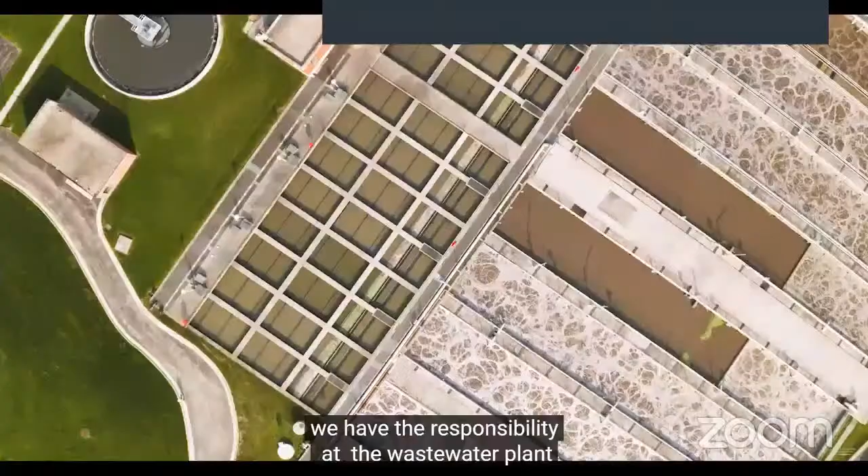Now what we're trying to do is clean the water up in the watershed or in people's homes before it even comes to us, so the water is actually cleaner when we get it than in the past. To know that we have the responsibility at the wastewater plant to keep water clean and keep the water cycle moving is something I think we're lucky to do.